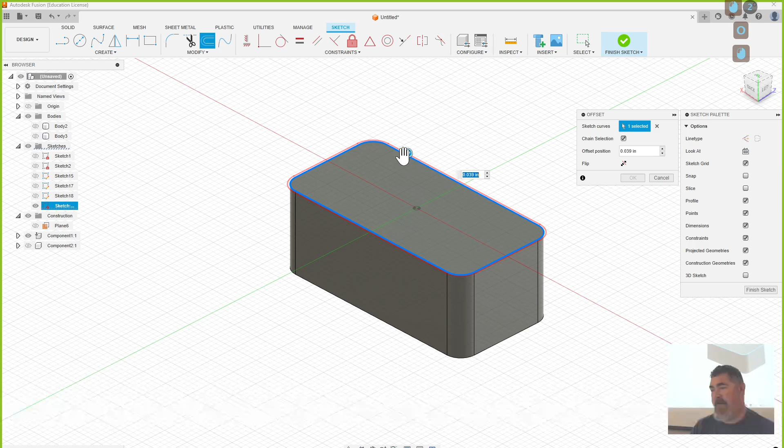Just like a lip that went down on this, I could easily just create a sketch, offset it a little bit, and then extrude that down, right? That's an easy way to get a lip on it or something.

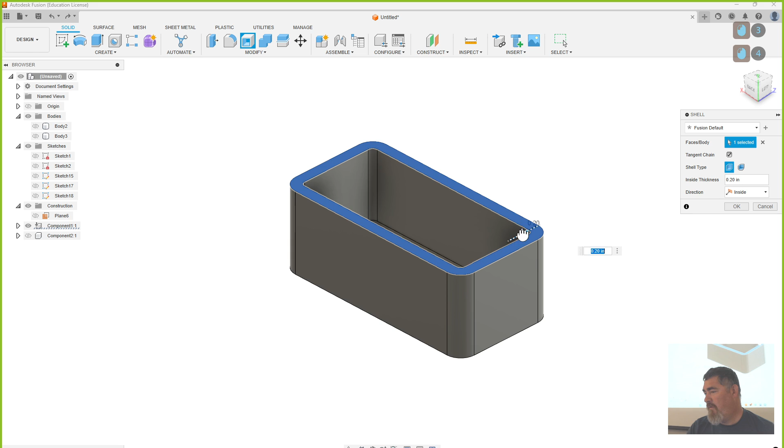But what if I hollow this out? Yeah. And I want to have a recess inside of here that's at some other shape going around. And not at the top, but somewhere down in here. Now this is a good time for sweep.

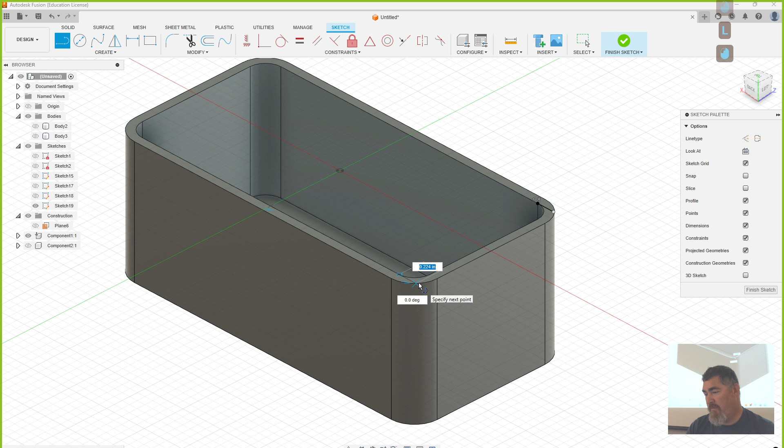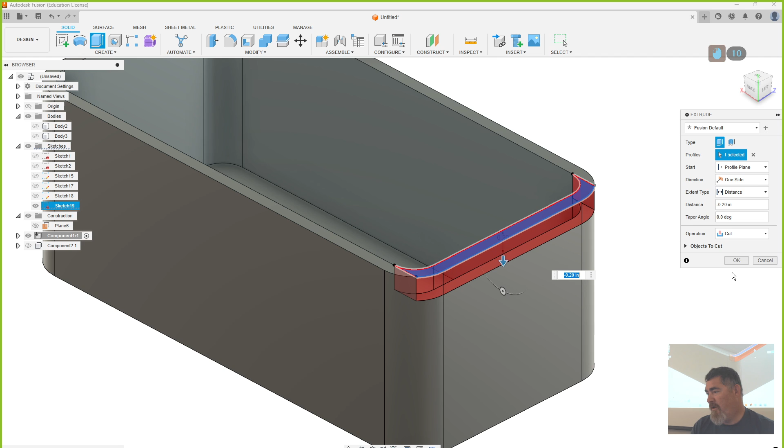Like a common thing I'll do is, if I want this to have a sliding top on it, I'm gonna draw out, and then I'm gonna cut this down a little bit. Corner didn't go. Coincident, circle there. Right. I want to have a little thing so this can slide in. So I want a thing there.

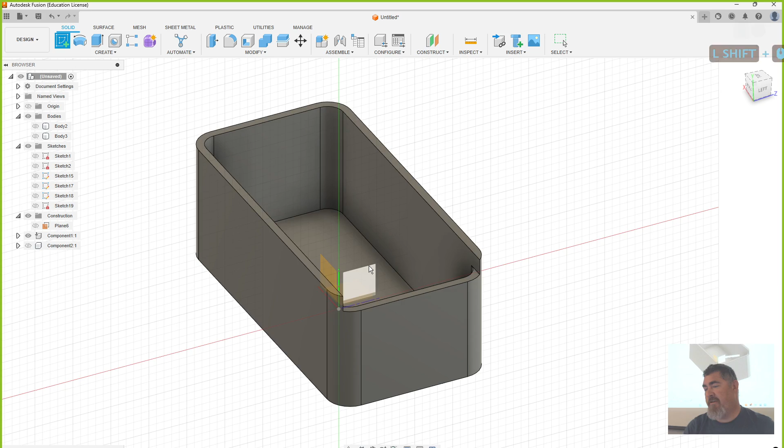Now I need to draw whatever that shape is. So again, I could either make a new plane here, or I could also create a plane on my mid plane here if it was going to go all the way around, but it isn't going to go all the way around, so maybe I'll start there, or I could start on this plane there. I'm just going to do a plane along the path. Kind of an easy way for sweep is just to start to make a plane at the end of it if it's not on an easy thing.

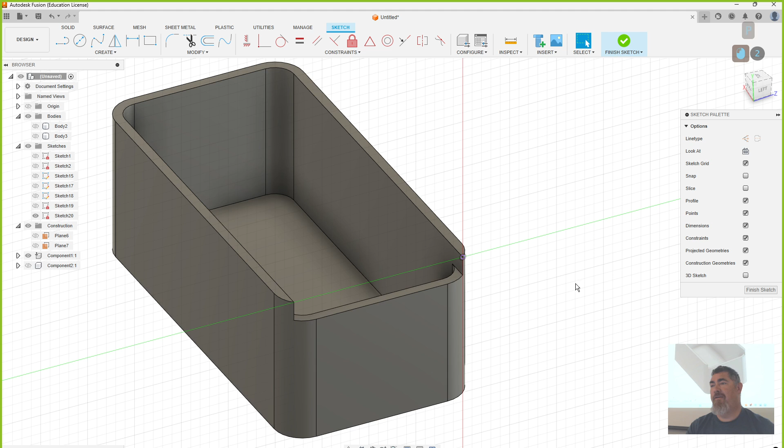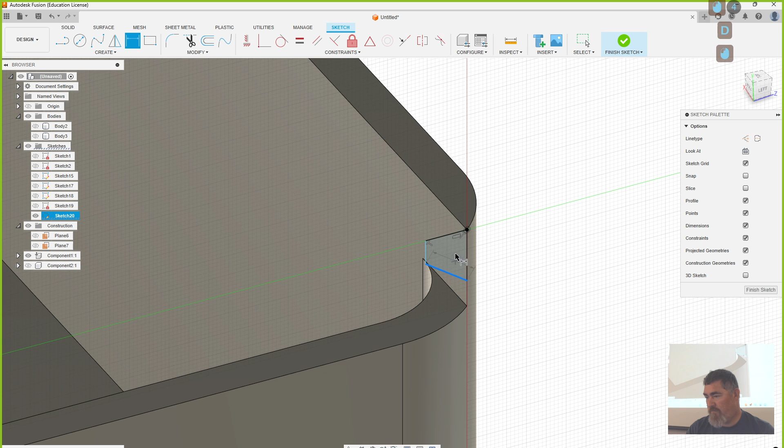Create a sketch, and then project that corner so I'm stuck to it. I'm not off of it just a little bit. Come on. Draw a little in there. And now I can just tell it to sweep this profile along that path. Now it goes all the way around the part.

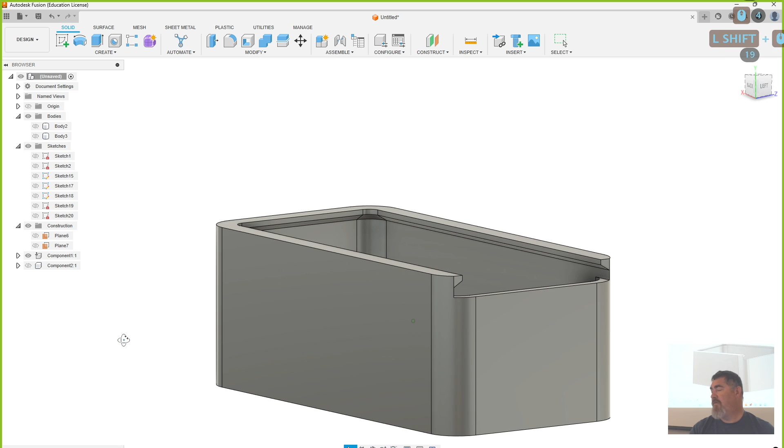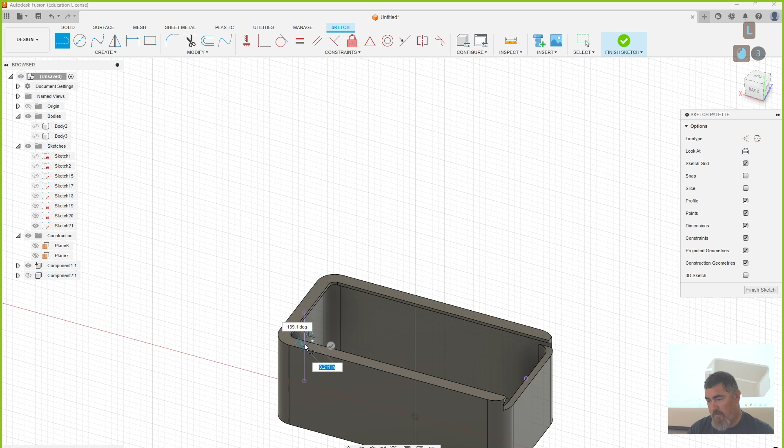Now maybe I can also do here. I just want to project that point so I know where I am. And I want to project that. Actually, use that same size and just pattern it down.

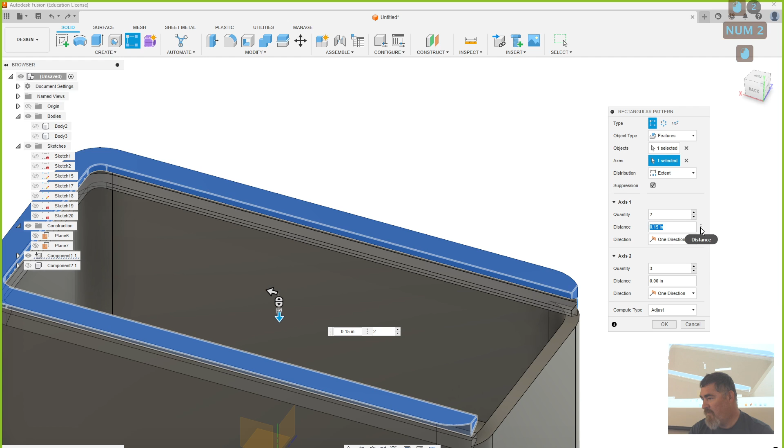From there to there. Now I've got a lip for it to sit on and for it to slide into. I can do that. Now I can make up my piece that slides into there. Okay. So that's a, yeah, I did. So that's a real common